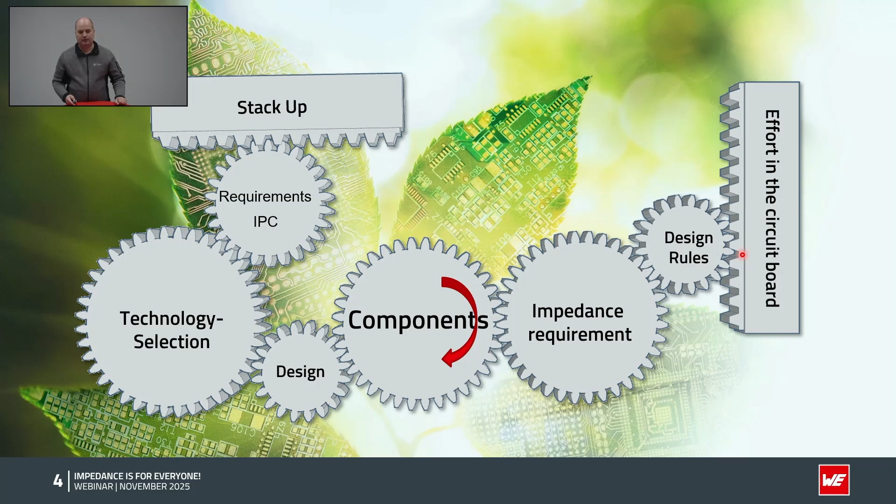And if we go now into the impedance, what is impedance? Where does it come from? The impedance itself is the AC resistance of a conductor. Can be a wire, can be a board, can be a component.

So if you compare it with a DC application, you have the standard ohms resistance, and as higher the frequency gets, as more the impedance takes over, and you have to use this value for the conductor. It starts to get a major influence factor at least above 200 megahertz, so really early, and then you have to think about impedance into your whole design, your setup, and also your components.

Today we have a lot of different ways to get the impedance, and I took the IPC formula as a simple stack-up, and I thought I start with heavy stuff in front, that we get more and more easy stuff at the end. So this is the formula to do a simple calculation of a surface microstrip, and let's go quickly through it and get some ideas what does this mean for us in the practice.

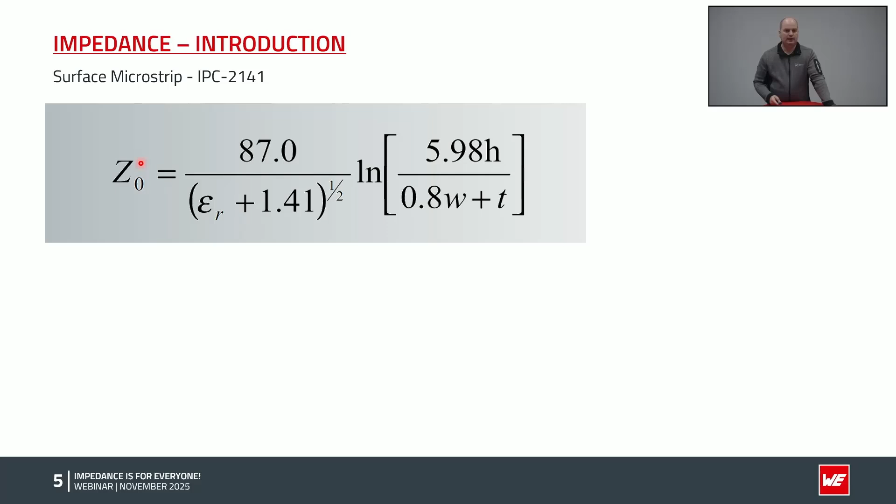So we have the target value, in that case the Z0. This is the impedance value which we want to calculate. We need for this calculation the epsilon r. In math it's often the epsilon r value. In the datasheet it's often labeled dk for dielectric constant. It's the same.

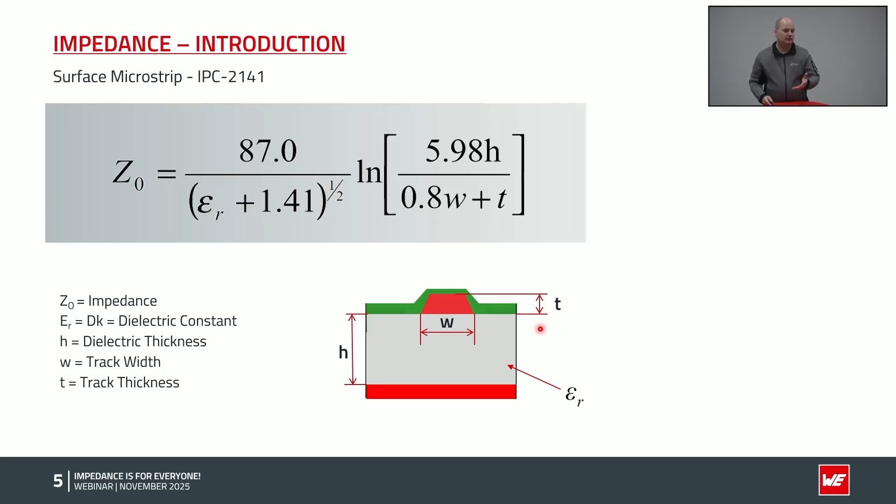The 1.41 is some magic number from the formula, also the 87 natural logarithm here, also a magic number - everything in the books. For us, important is the height of the dielectric, the width of the track, and the thickness of the track. These 4 parameters are necessary for a simple microstrip calculation, and if you have a slightly advanced calculator, you can actually do it by hand. So it looks complicated in the beginning, but it's still possible to do it by hand. Of course, in the real world it's not so easy.

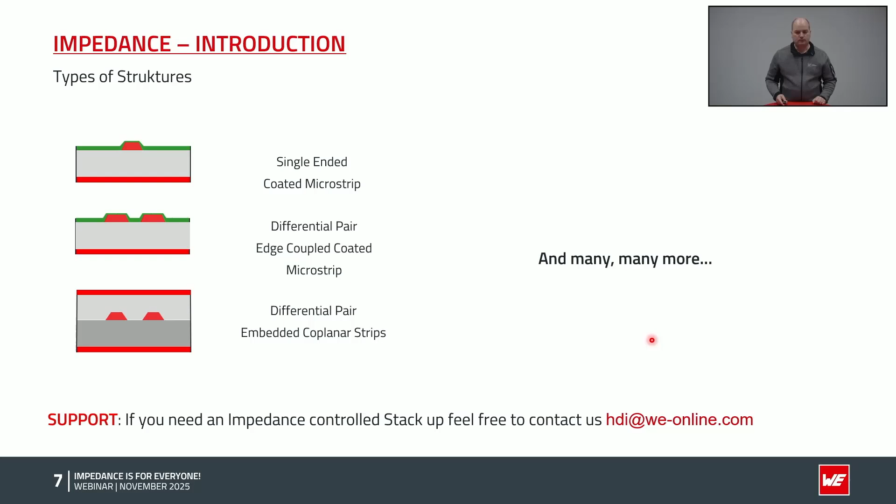Let's skip one slide and go back afterwards. We have a lot of different options. I've shown you the simple version. You can have differential pairs, you can put them on the inner layer, you can use different materials, and of course it gets more and more complicated, which makes it hard for us to find a one-fits-all solution. With my experience, I'm pretty convinced there is no one-fits-all solution. We have to find individual solutions for everybody. The layout is influencing, the component is influencing, sometimes the price is influencing. So if you need an impedance controlled stack-up, feel free to contact us either with your usual sales contact, or you can contact us on the shown email address, and we will find a solution with you together.

As thicker the dielectric is, the more the impedance will raise. The copper thickness, for example, has a low impact. It will not change it very heavily, which is actually pretty good, because usually the copper thickness is set by, for example, IPC reliability requirements. If you have IPC class 3 with 25 microns copper in the via, the copper thickness is already locked in, and you cannot use it as a free parameter in your design choice.

So most of the time we work with the track width and the dielectrics. If this is not enough, we can change the dielectric constant by changing material, either the pre-preg or the whole core replacement, using a more suitable high-speed material. But this, as we'll learn later, is really a big step, it influences a lot of factors and has to be carefully considered. It is possible, but it will usually be very costly.

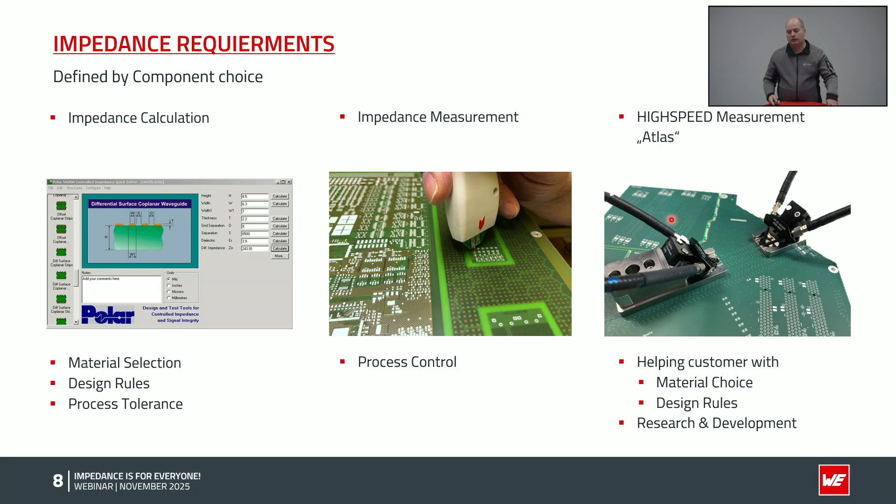It's a very important research and development tool. The effort is higher than standard impedance measurement, so it's maybe not a very effective process control because the effort is so high. But especially in complex projects, it is useful to have real measurement data to check the datasheet values in the beginning.

So this is a quick introduction - what is impedance, why is it important, what is the main influence. Let's go into the design and manufacturing points with a stackup.

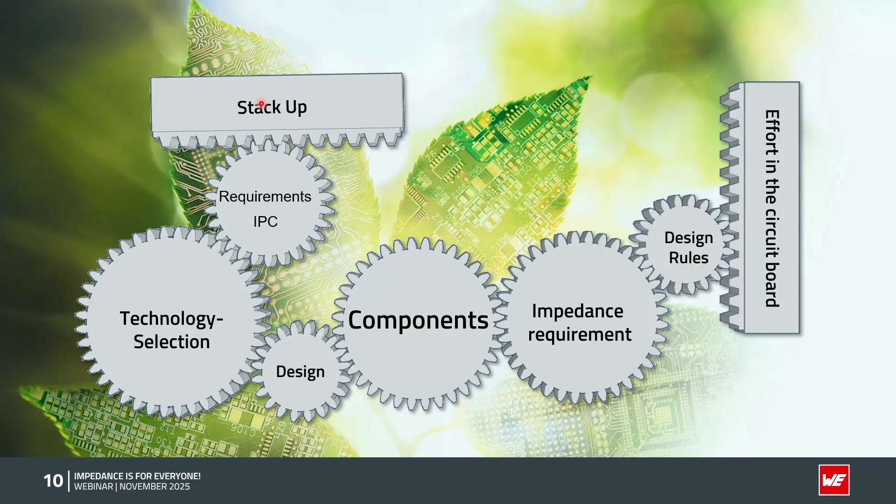Coming back here, if you choose a component, the technology and the stackup is directly influenced. Let's go into a real-world example.

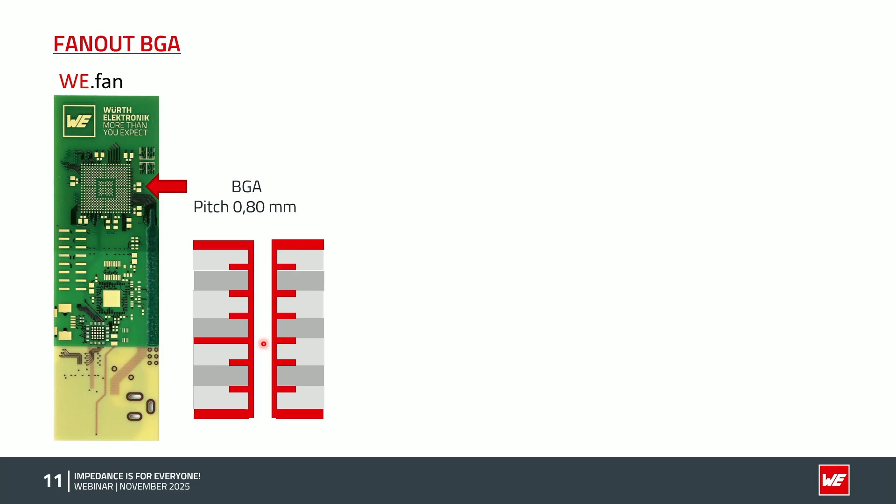You have used a BGA with a pitch of 0.8 millimeters. This is sometimes possible to do in a mechanical fan-out. You don't need HDI, you can use it, but there are sometimes options to make it cheaper. Now this component is not available anymore. You have a successor component, and in worst case scenario, the pitch is only 0.4 millimeters in the successor component, and then it is not possible to do a simple stack-up.

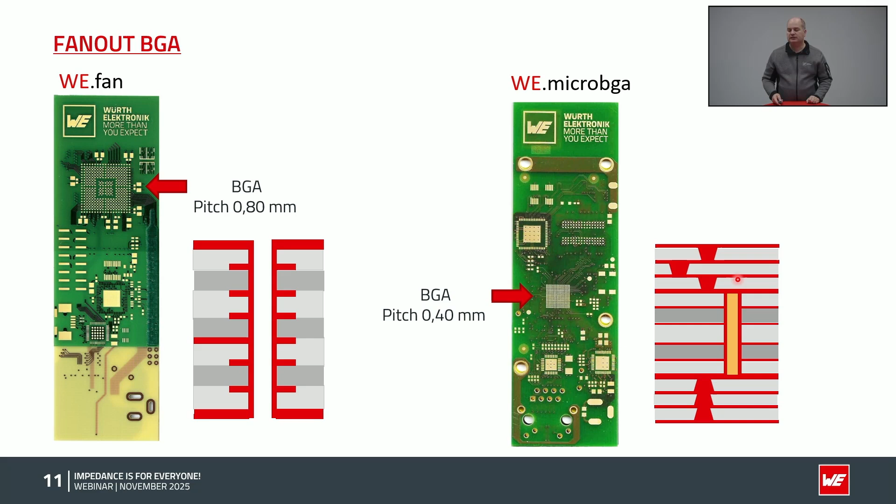You have to use a very complex HDI example. This example is of course extreme, but it shows you the pros and cons of both worlds. So the component gives you the need for some HDI layer. The HDI layer defines the prepreg thickness. Not every prepreg is possible to laser drill, especially very heavy glass fibers like the 7628 - it's not possible to laser drill it. So you have some fixed points here, and we have to consider this in the impedance calculation.

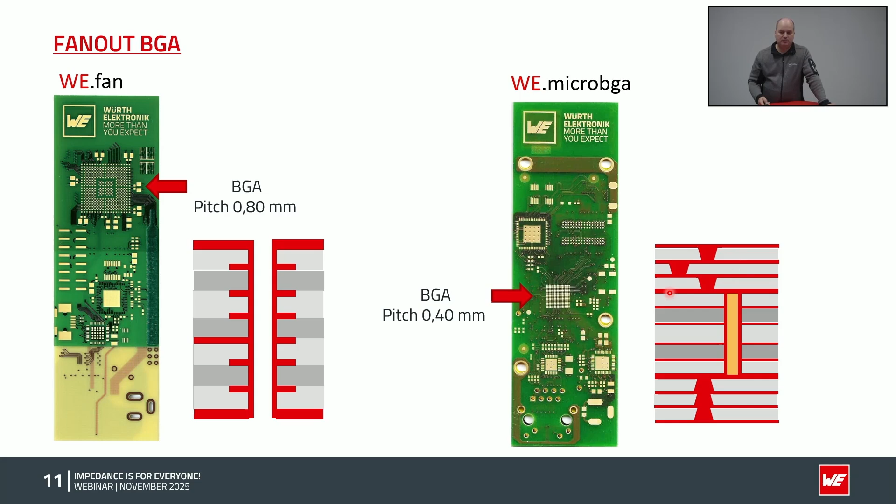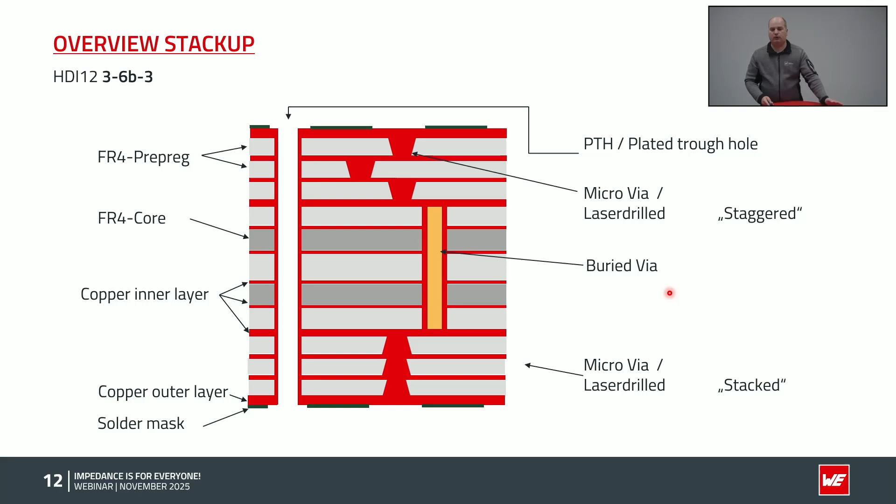How do we build such a board? For your reference, you will get the slides afterwards. Here is the labeling, but for speeding up in time, we will skip over it and go directly into the production. So we start with a 6-layer in the beginning, in the middle.

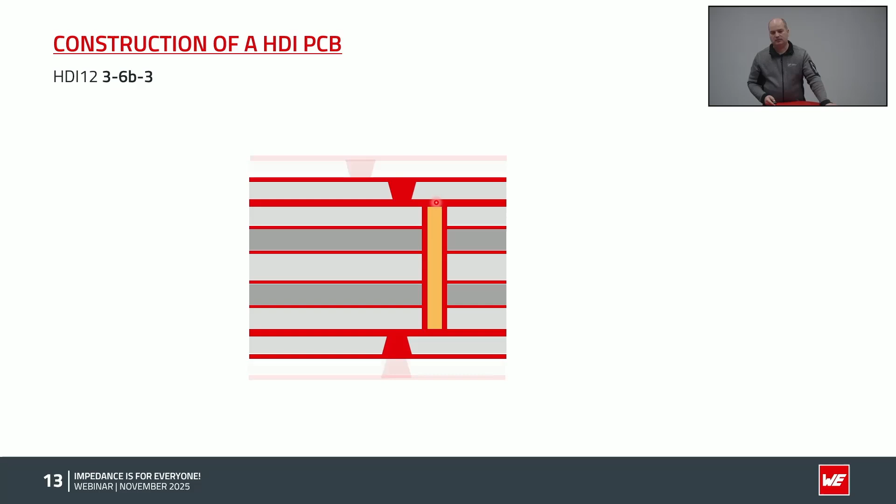Press it, drill the buried vias, fill them. In that case, it's a type 7 filling with a cap on top of it. Then we add on both sides together a new prepreg, go back to the pressing, press the prepreg to this board, go to the laser drilling, drill the microvias, make a copper filling, and repeat and repeat.

So we have to go through several steps in our production. In that case, we have 4 press cycles, 5 photo processes, and 6 galvanic processes. And of course, it should be natural that when the delivery time is going up - a standard 8-layer board has only 1 press cycle, 2 photo processes, and 1 galvanic process, and you have some delivery time. If you now go 4 times through the press, of course, the delivery time must be higher.

So for us, very important, usually the stackup is symmetrical. If you add something on one side, you do the same thing on the other side. If you don't do it, you get warping, for example, in your soldering process, and it's not good for us and not good for you or your EMS. So we love symmetry here.

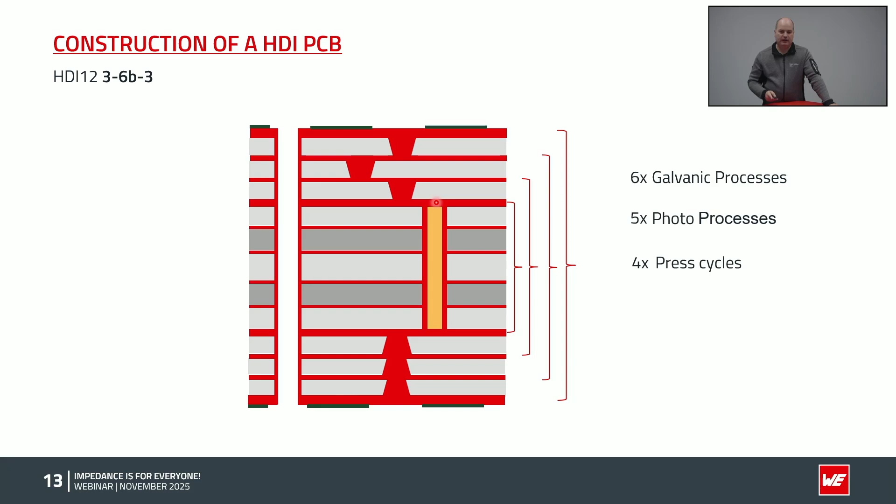Also, the technology choice - if you have a small pin-out, staggered microvias is a feasible option. You can fill them on the outer layer for enhancing the process window in the soldering process. In that case, we have a resin filling type 5 in the microvia, because on this board there are some buried vias. It's not necessary, but also not a bad thing. Usually it's enough to fill the microvia with a prepreg resin in the press to avoid any voids.

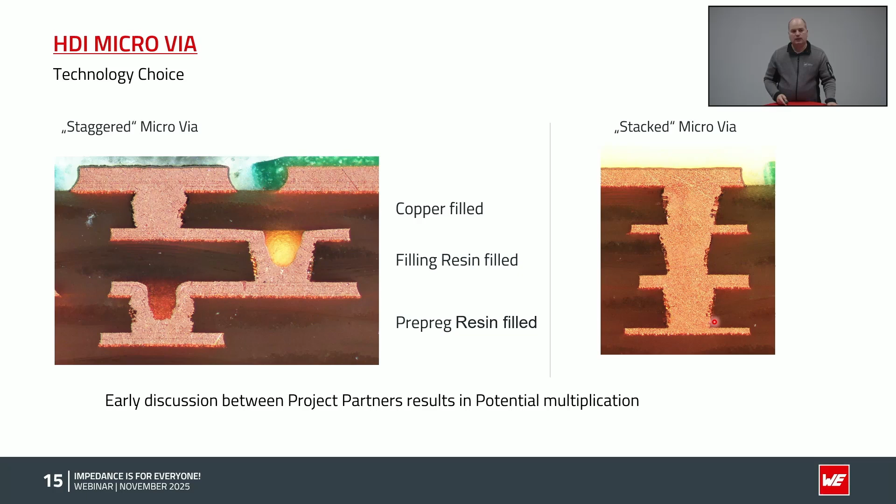But in the case of a 0.4 millimeter pitch BGA with a high pin count, you have to go the stacked microvia way, because you don't have the footprint space in the board. So you have to do the microvia filling on every layer. You can save space, but it's more effort in the production, and more effort means more money. So this all is affected by the component choice.

A next point, also a very important one, is the etching of every layer. How do we etch? Usually inner layers, for example - we start with 100% copper. On the board we want to have some differential pairs shown in the right hand corner, and we will laminate a blue etching resist again on a full frame. We expose it with light, wash away the non-exposed areas, and then we have etching resist with some openings in between. We use some etching agent.

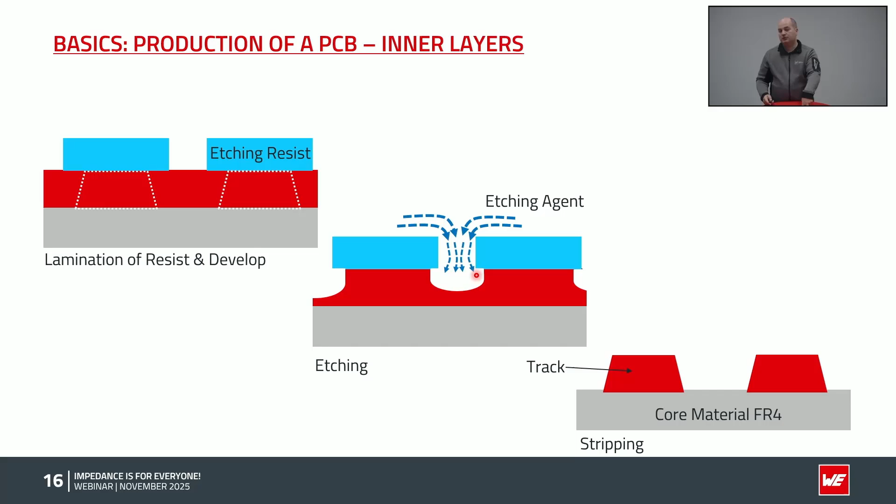We spray it onto the surface, and for every micron we etch to the depth. As soon as the sides are exposed, we also etch to the left and to the right. So if we etch 1 micron deep, we etch 1 micron left, 1 micron right - so for every micron of depth we have 2 microns to the side. And as we etch on, here's a picture from a machine, this typical pattern of a trace is formed.

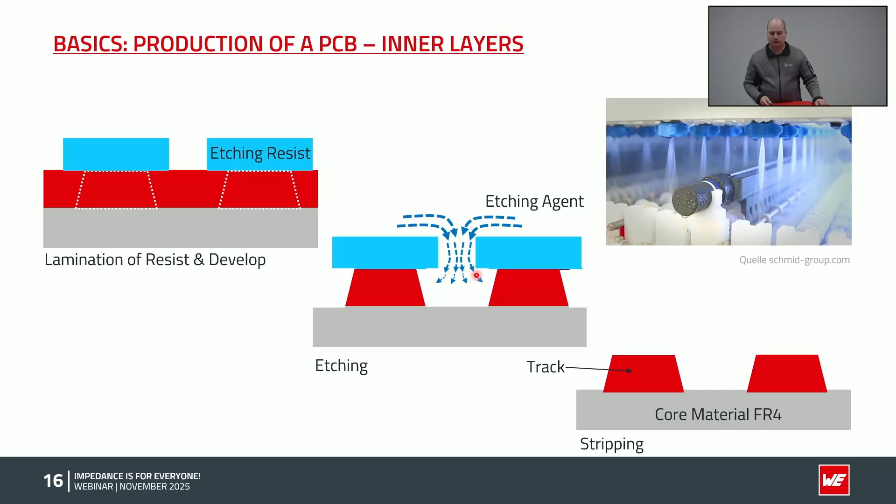And this is very important because the copper thickness is affecting the space in between. The higher the copper gets, the more space we need by physics. It's not our choice, it's just physics, how the etching is working, that we need some space here.

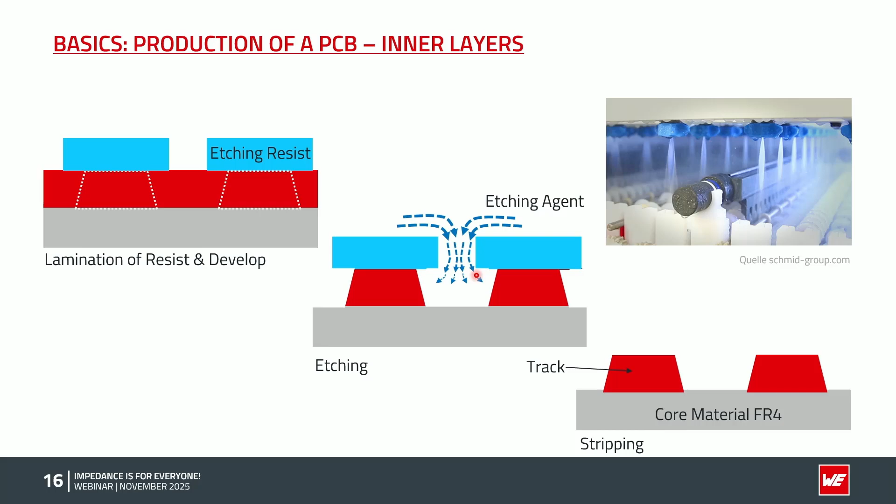We have some design guides available on the homepage.

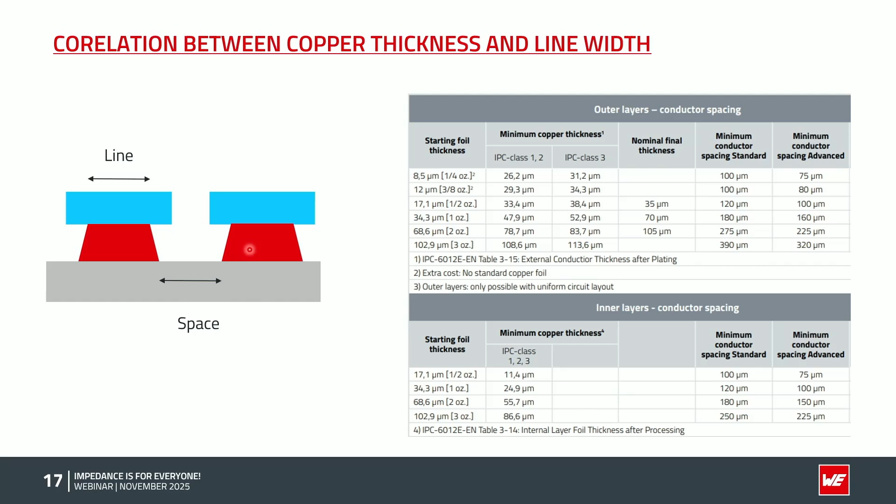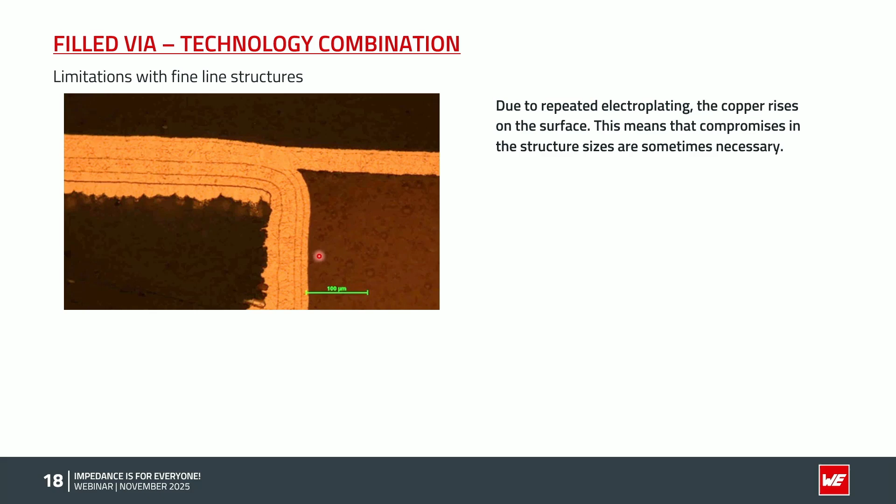As thicker the copper is, as more space you need in between the conductors. For us, it is easier to make narrower traces, to narrow down the line width, as long as we have enough space in between. This is very important also later for the impedance calculation, because if you have some technology combination, like here shown a buried via with a filling with a type 7 cap on top, every line you see here is a galvanic process, and as more we have to go through the galvanic, as higher the copper gets.

What we learned now is as higher the copper is, as more space we need. If we have not enough space, we have here a picture showing what happens when it was not enough - it is a heavy short. This will sort it out in the electrical testing.

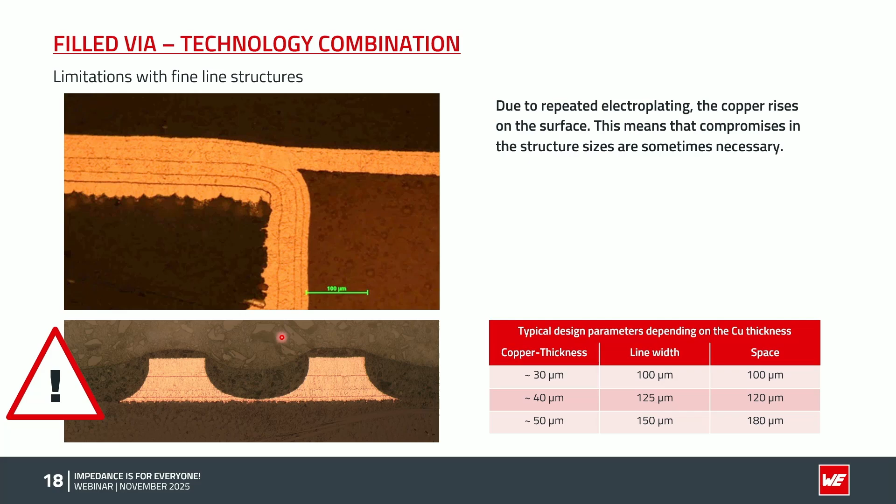But if you only have 1 micron etching more, it's not a short anymore, but it will not be good for our impedance calculation. So here it's very important to find optimal parameters in the impedance setup, in the line and space width, to make a good reliable board that you can avoid such cases, which is layout influenced - very important, influenced by layout - to consider this point.

So okay, let's increase the distance between the tracks. To get the same 100 ohms, we have to lower the pre-preg thickness and also lower the track width. Maybe you have some dielectric high voltage requirement that you don't want to have such a thin pre-preg.

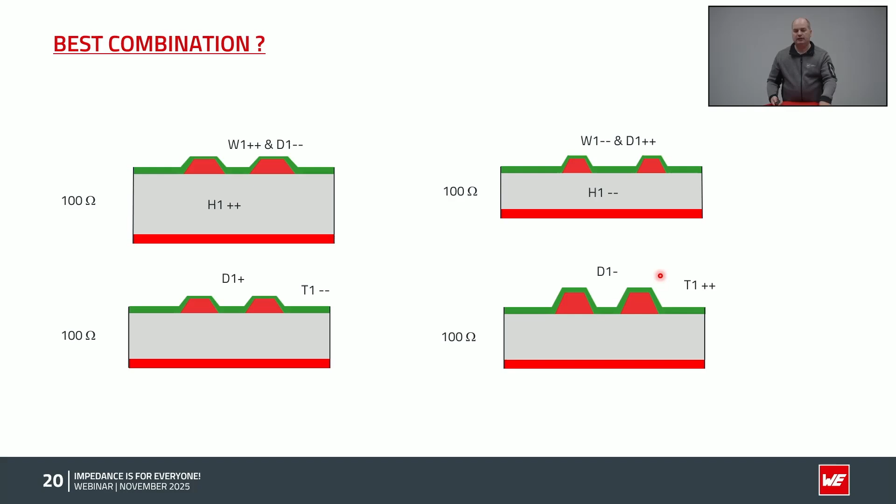So let's jump into high-speed materials. What is going on if we can't find good impedance solutions only by the dielectric and the track width, for example, if we have to change the Dk value of a material.

So what is material? As a quick starter, we have usually double-sided coated copper cores and prepregs. They are made, of course, with copper. They have glass fibers included, and there is also some resin to glue everything together. Let's go through it step by step.

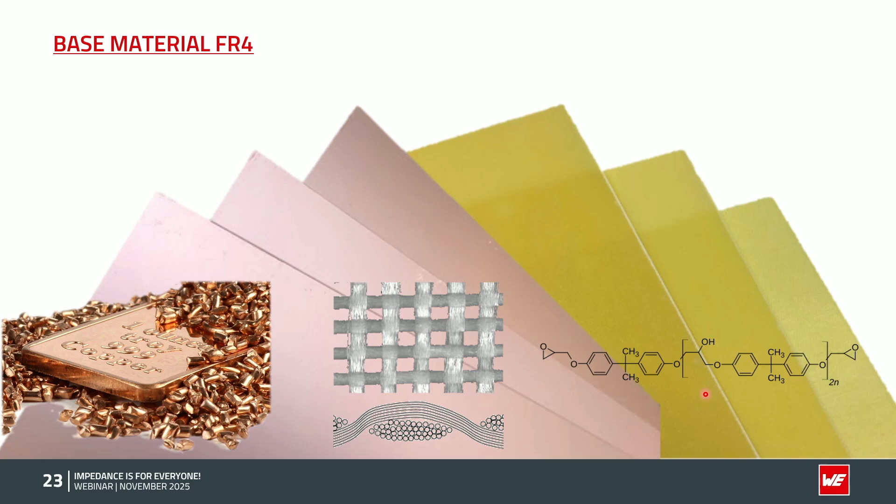First, of course, the copper. That the copper is sticking to the plastic, to the epoxy, for example, it's very important that we have some kind of roughness. Every copper foil has a treatment side and a shiny side. The treatment side is usually to the inner of the core, and as higher the copper is, the copper foil, as more rough it is by nature.

It's in the construction process of a copper foil - as more copper you have, as rougher the treatment side is. And of course, the other side is the so-called shiny side, because usually it is shiny, it's pretty flat. If you want to glue some metal to plastics, and if it's really soft and shiny, it will not stick very well. So we have to roughen up by etching this shiny side and add also an adhesion promoter. If you would do some painting, often this is called primer. We have a similar thing in the PCB setup. So even here we have to rough up the copper and create some roughness.

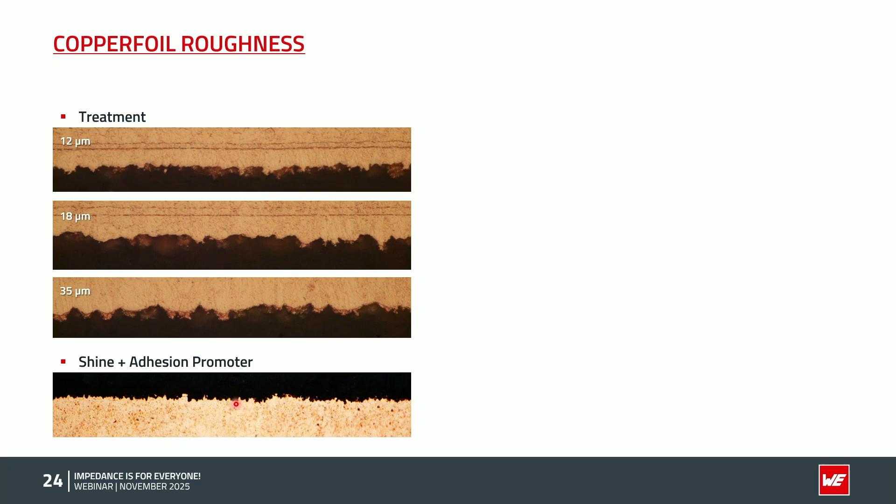Why care about this point, you might ask? There's a physical effect called skin effect.

As a simple explanation, as the frequency gets higher - if we look at a wire, in low frequency or even DC, the whole cross-section is used up by the current flow. As frequencies get higher, the current flows more and more only at the edge of the conductor. In a worst case scenario, at very high frequency, it's really only the skin of the wire.

If we compare that to a trace: if we feed current through a trace, it will not flow the direct way we usually expect. Current takes the shortest and easiest way, but not in high frequency areas - it really goes through every rough spot, because there's also a so-called proximity effect.

Usually we have the ground layer underneath, and the current is also closer to the ground layer. So the rougher the copper foil is, the more skin effect we have.

If you want to learn more about skin effect, I'm sure there are bookshelves full of information and books and seminars about it - you could fill a whole week just with skin effect. So let's keep it simple here.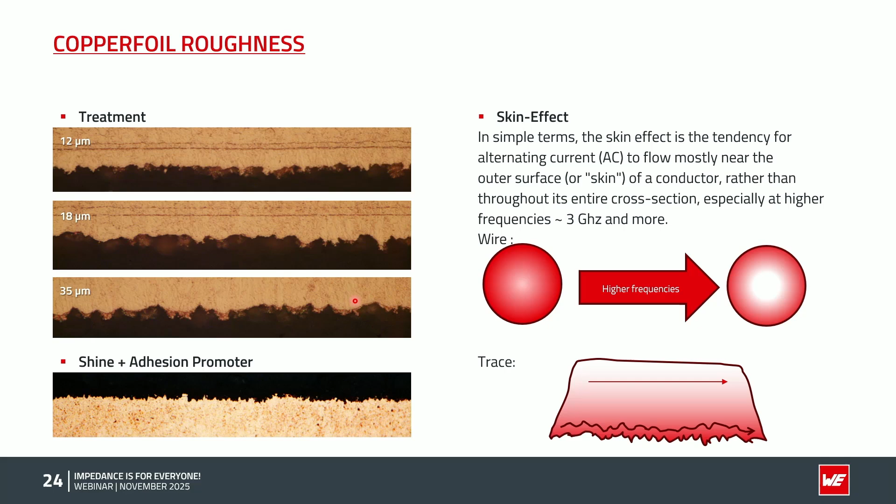If you have a really high frequency board, let's say more than 10 or 15 gigahertz, sometimes it's necessary to use dedicated low profile copper foils with less roughness - but of course less roughness means less adhesion. In a perfect world we'd use a completely flat copper foil, but then you could just peel it off the board and couldn't solder any components to it. So again, a compromise has to be found.

If we look at a pre-preg, the glass fibers in the board, there are several cases - this is just a short extract, but on the market there are typically 20 different styles. They're usually labeled with names like 106, 1080, 7628, which is maybe one of the thickest, and usually not used in high-speed boards because the parameters aren't optimal. Usually it's the other ones, and many more - just as a reference example.

An important thing here: we have at least two different materials inside. We have the glass, which has a typical value of 6 in epsilon r, and the resin itself in an FR4 board has 3 point something.

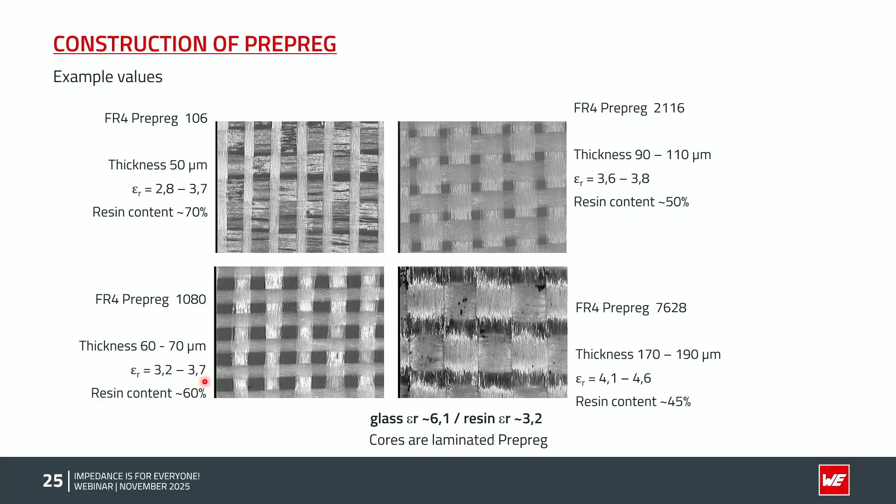On the datasheet you find different numbers because you see a summary of these two values, and if the resin content changes - either by design choice or your layout, which of course influences the resin content after pressing - the parameters will shift a little bit. I'm sure all the datasheet values are correctly measured and can be trusted, but the layout will influence this value again, so we need some experience to feed into the impedance calculation - knowing that with this typical layout or another kind of layout, we'll later have a typical resin content of something else, and then the value changes.

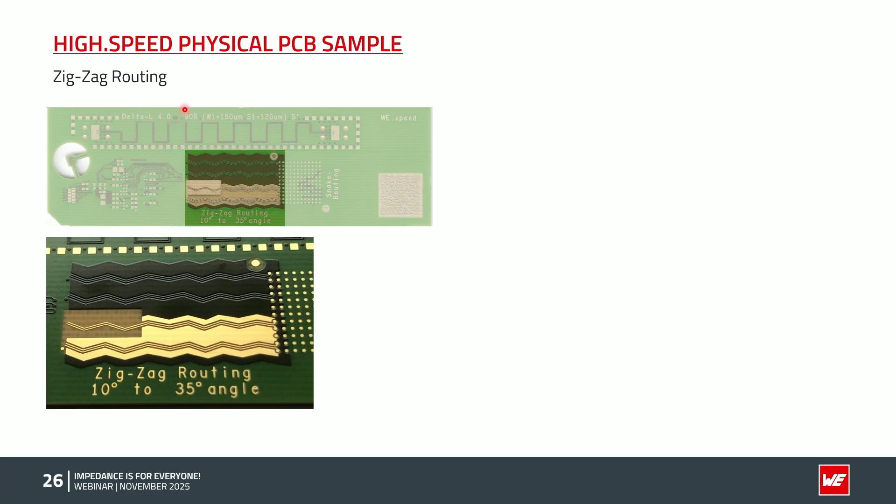Again, a short extract - we made a dedicated high-speed seminar about this roughly a year ago, about our physical hand sample, and there's a so-called fiber weave effect where these parameters will influence things. For example, we have a differential pair where one trace is directly on top of a glass fiber, the other is directly over these holes where you have 100% resin - this is a disadvantage. The parameters will change, the speed of the signals and the runtime of the signal will also be influenced.

So what is a good option? You can tilt the whole board, your design, in our production panel by 10 or 15 degrees. But this lowers the outcome - how many boards we can produce at once - so the costs will rise.

Maybe you have only a few signals, so you can go with this zigzag routing, and only the most critical signals are in this zigzag pattern, mixing all the parameters, and then it evens out. Usually such a case is important at frequencies of 20 gigahertz and higher.

Most customers are not in this area, happily, because if you want to design such a thing, most systems did not support it. They are working on it, but it's not implemented yet, so you have to draw such a pattern by hand.

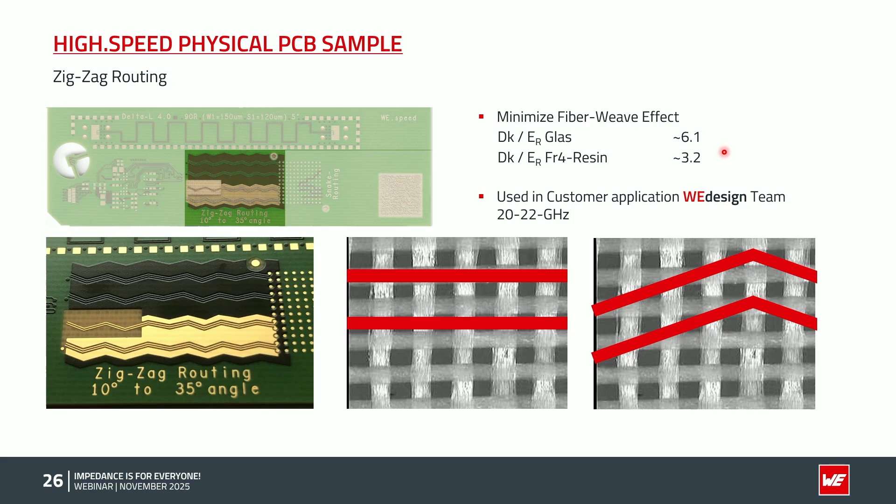So the last part of the material is the resin. For high-speed properties, the resin has a very big influence. We come from the good old epoxy resin, for the last 50, 60 years we used in most cases an epoxy-based system.

Every raw material supplier nowadays has a so-called mid-performance material. Our choice was Panasonic Megtron 6. It uses a different kind of resin, not epoxy anymore, it's a PPE resin system. We have a TG at 185.

The Dk is very low compared to standard raw material, and also very important, the loss factor. Don't get mixed up by this 4.

You still find in a lot of application notes on components Rogers material used as a reference. Rogers had a good start very early in the beginning of this high-speed development. They offered good performing material. If you compare the values, they are pretty similar to these values nowadays.

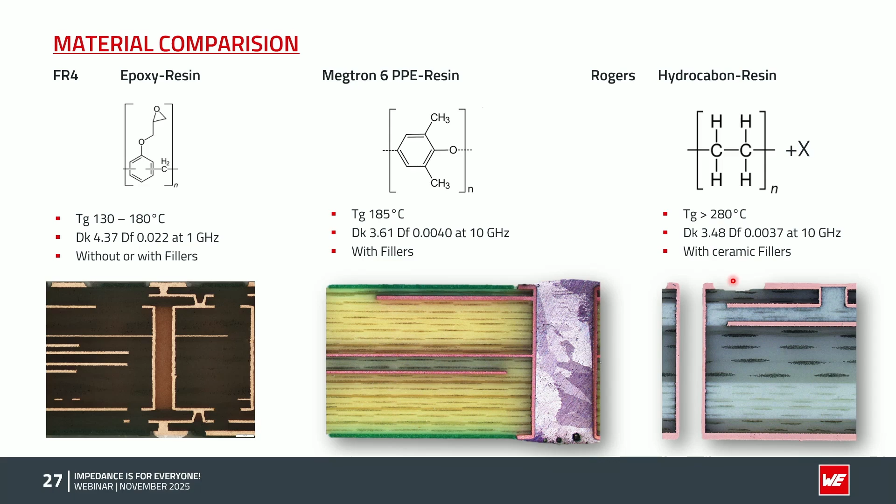So changing the material has a lot of heavy impact. If you have a good material choice, a mid-performance material with similar parameters, it's not so critical in drilling, for example, compared to using ceramic fillers with similar properties. So it's very important whether you can change the material here.

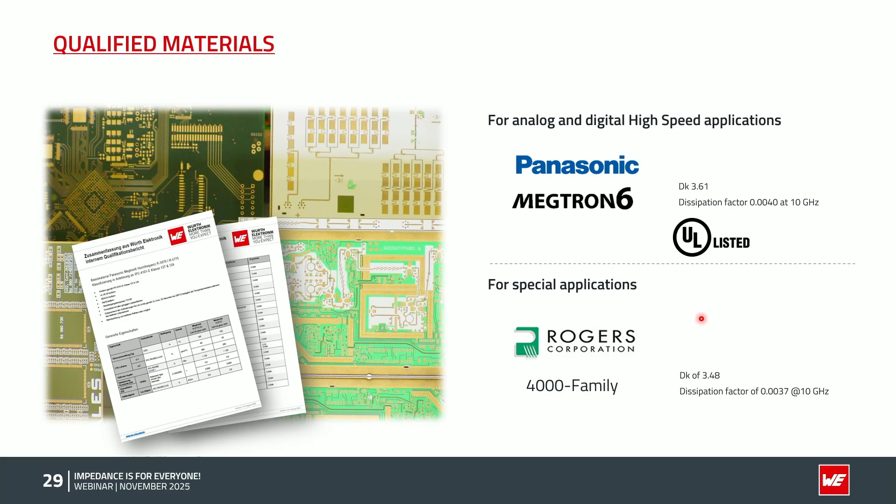We have a lot of materials qualified. Today our go-to material for high-speed applications is the Panasonic Megtron 6. Shortly we'll have a Megtron 7 also available. We can also do the Rogers material if necessary, and our partners in Asia also have a lot of materials available to get you some ideas.

We have these nice physical samples, which are really a good starter to get introduced into the material. You can order your sample for free at the shown address.

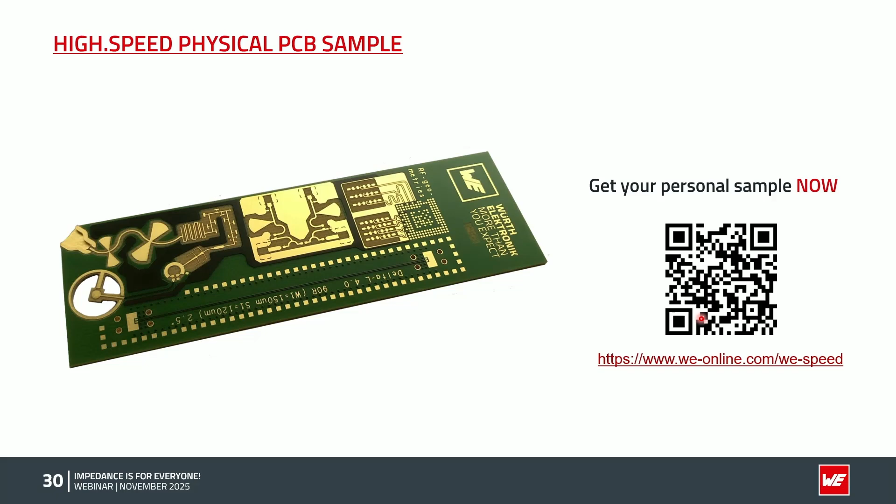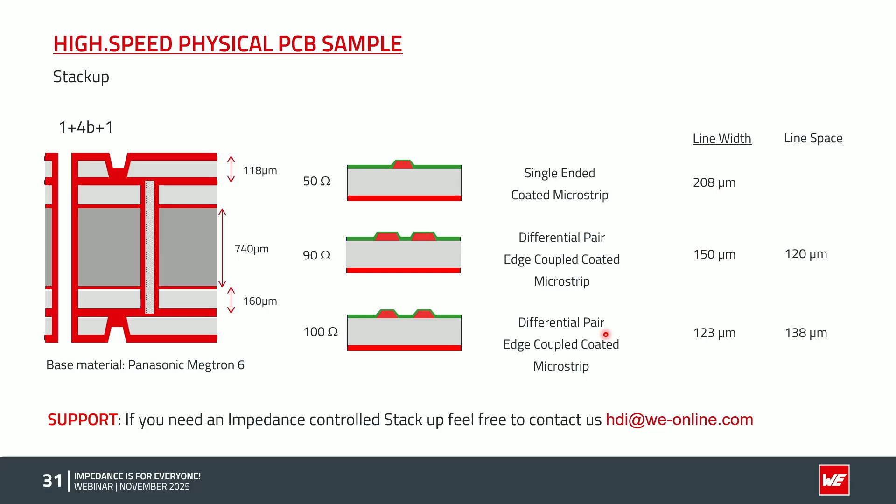There's a lot of information available. We have also shown how to make the impedance calculation on this stackup. Again, not as a copy and paste solution, just as an idea, as a starter to show you what the options are with this material. If you need a solution for you, feel free to contact us either with the shown email address or with your usual sales partner.

And we find a solution together. Very often, also in discussions about high speed, we get requirements about backdrilling.

So what is backdrilling? Backdrilling is usually used if you have a via going from top to bottom and you only need the connection from, let's say, top to layer 3. Then the rest of the via acts like an antenna, can pick up strange signals from outside or from crosstalk, and can mix up your signals and make your signal integrity worse.

What was the solution in the past? Drill the via away, drill it back, and get rid of the stub. This technology was invented before HDI microvias were available. Today we have microvias, very reliable, very widely used. So today it's very easy to find an HDI solution. It's cheaper, faster, and more reliable than doing backdrilling.

So if you need something like this, really consider going for an HDI version. Even though we can do backdrilling and offer it, it's a lot of effort.

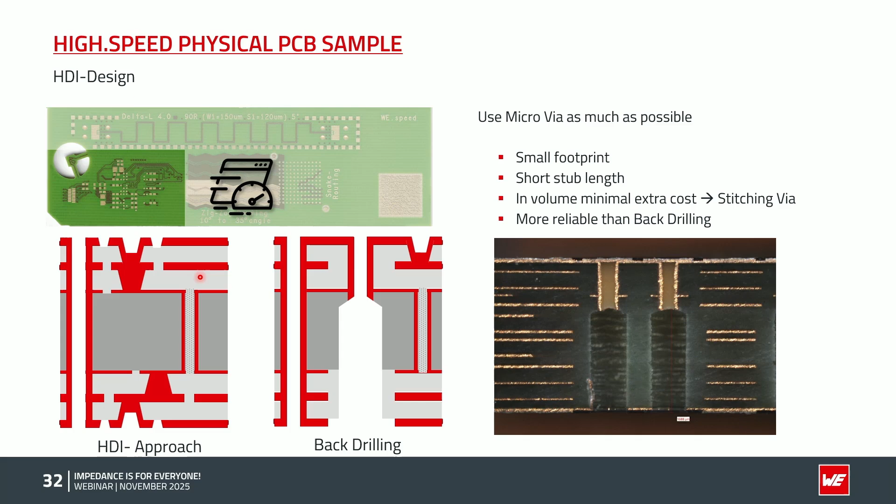And then, for example, you have a waveguide where you have a shield on both sides on the ground, and maybe you solder a lid on top, and then you have 100% shielding all around with not much effort on the PCB side. So this is really to give you some ideas, be creative, to achieve nice solutions.

you often need very narrow spaces and also small conductor spacing. But outside, if you have other components, please give us some wiggle room, give us some space so we can achieve a good yield. So if it's narrow, yes, you have to go small, but please give us some spacing in the other areas.

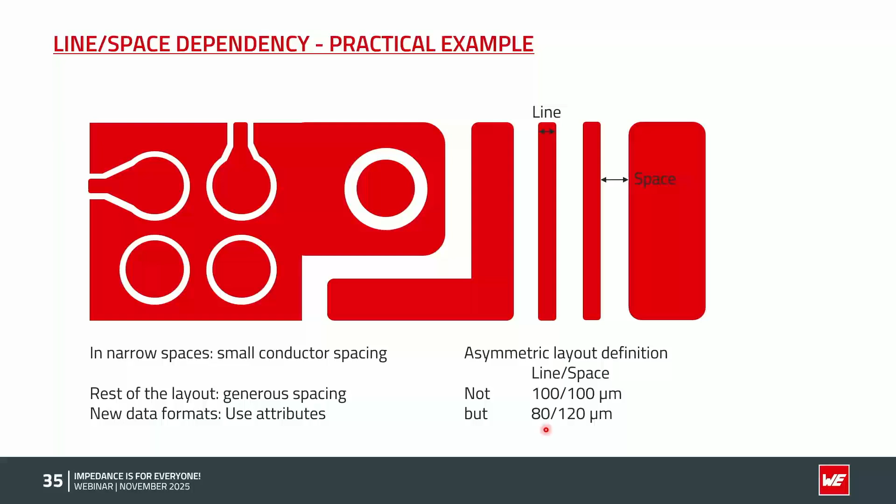Also, with the same footprint, typically the definition is, for example, 100-100, a symmetrical definition of line space and line width. But why not use 80 line width and 120 space? It makes production simpler, easier, higher yield, lower price. For you, it's the same footprint, and often if it's only a signal, the 20 microns doesn't matter for the signal properties.

Also, a customer had to change a component. The 0.8 pitch component was not available. He didn't want to do a 100% redesign of the board. The new component had a pitch of 0.5, and he was using the same impedance calculation. So in the new design, the distance between the tracks didn't fit anymore. So he had to change something.

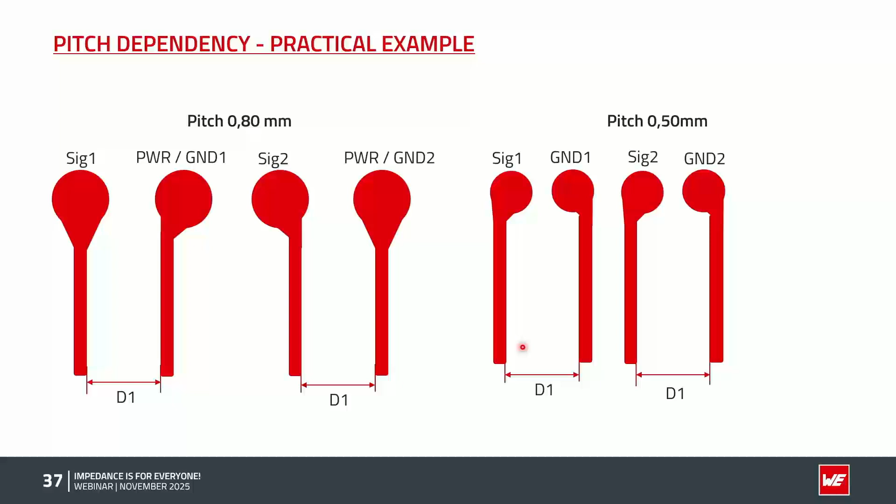What did he change? It's very easy - just shift the tracks away so that you have the same spacing, which was also the correct one for the old impedance matching. But now the signals are so close to each other that between the two different signal sources you get crosstalk. And this should be avoided.

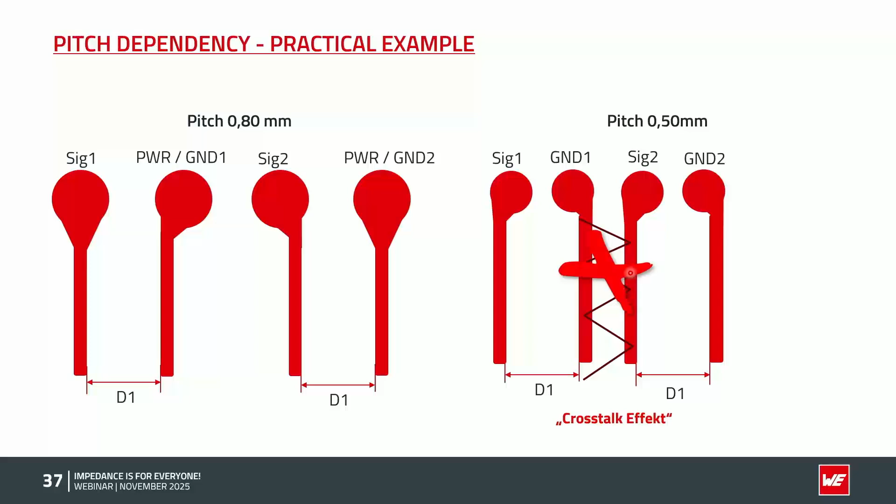You will really mess up your signal properties. Usually it's very hard to find if the layout is already done, and if you measure the performance and see it's not there, you have to invest a lot of effort to find such problems and fix them afterwards. So we found a solution together with him - we added microvias in that case, put signal 2 onto the inner layers, and the problem was solved.

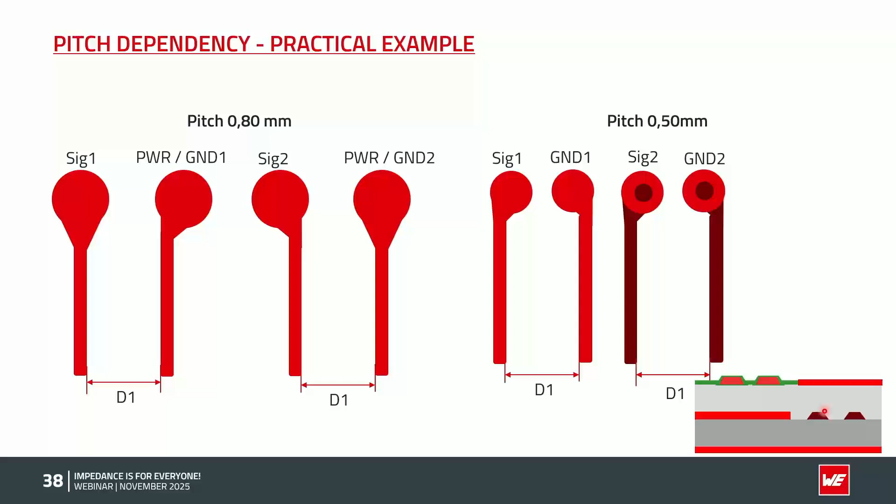So here, best practice is really a good thing. With flexible stackups, of course, a separate calculation for the rigid and the flex part is necessary. And we recommend, for example, in the flex area that you add such a crosshatch pattern, so that the drying is better and faster and you avoid delamination.

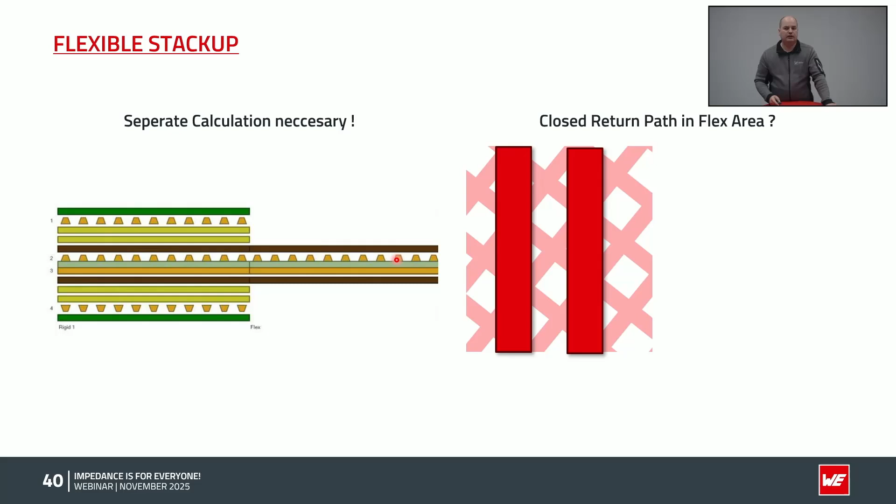But if you have a differential pair above these structures, again we have seen this fiber weave effect. It's a similar effect. You don't have a closed return path, which is really bad for a signal. The impedance simulation can simulate it, and you can adjust your parameters to it, but maybe you can just use a closed ground layer just in this area where the tracks are, and around it you still keep the crosshatch pattern.

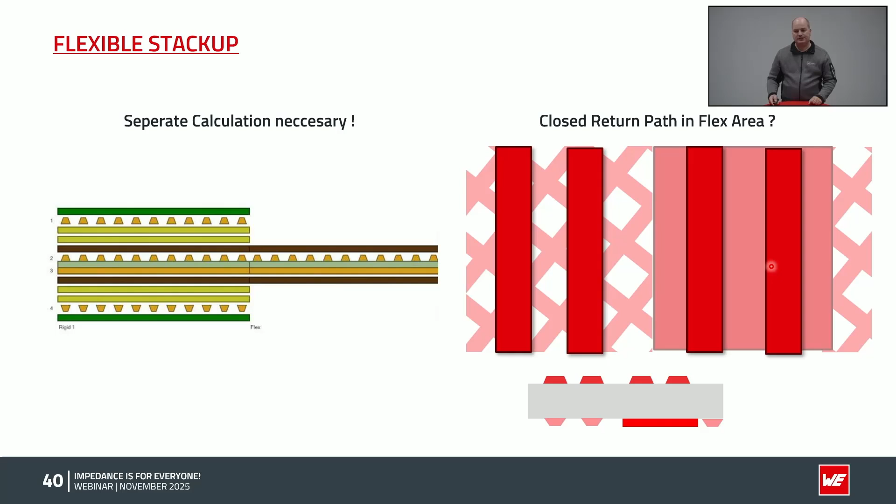The drying should still be okay, and your impedance signal is more stable, more reliable, and gives us in the whole tolerance section more wiggle room.

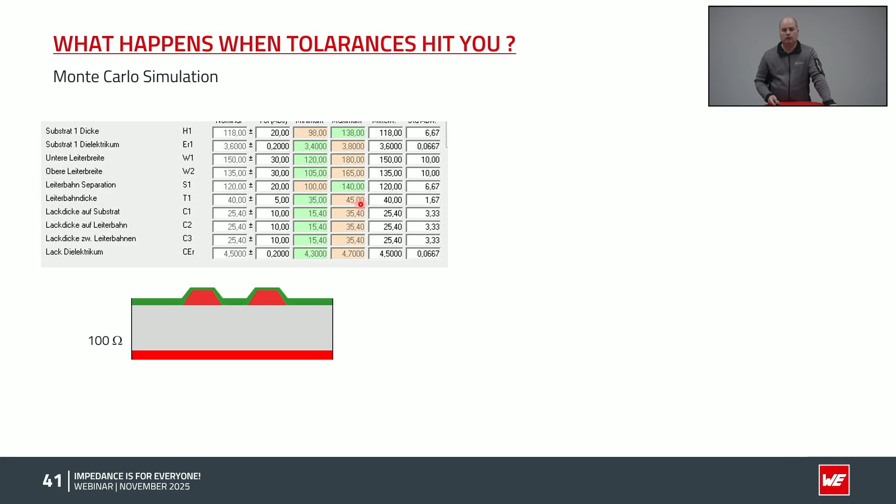Also talking about tolerances, a very important step. The Polar software has the nice option of a Monte Carlo simulation. So you use the properties of your design, and you can feed in some tolerances, for example typical process tolerances or the IPC worst case scenario, whatever is available. And then the software does 1,000 iterations, for example, doing a calculation with all different options, and so on. And then you get such a graph.

What does the graph show us? The target impedance, again, was 100 ohm differential pair. 100 is somewhere here. So if we have a look at the total graph, the whole graph is right shifted. So in most of the cases, even if the standard calculation which you do is exactly at 100, if you have the typical tolerances, the whole thing is more in the area of 103 ohms, which is inside the tolerance but not a tight fit.

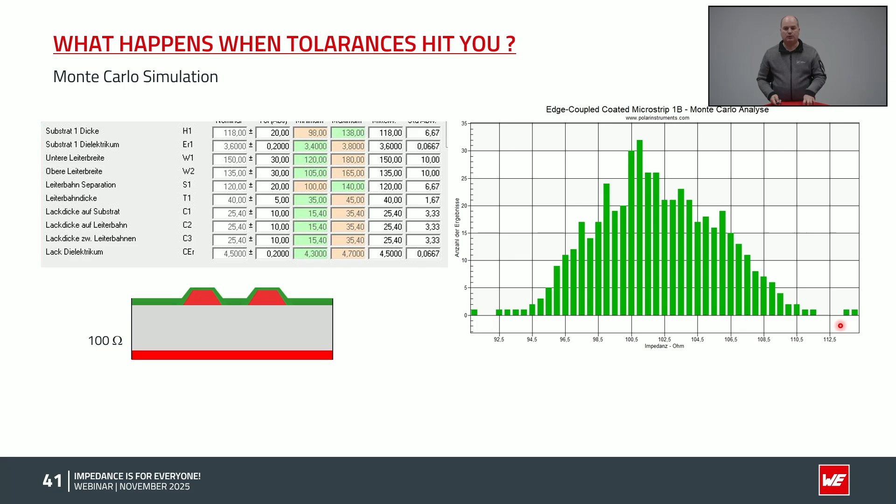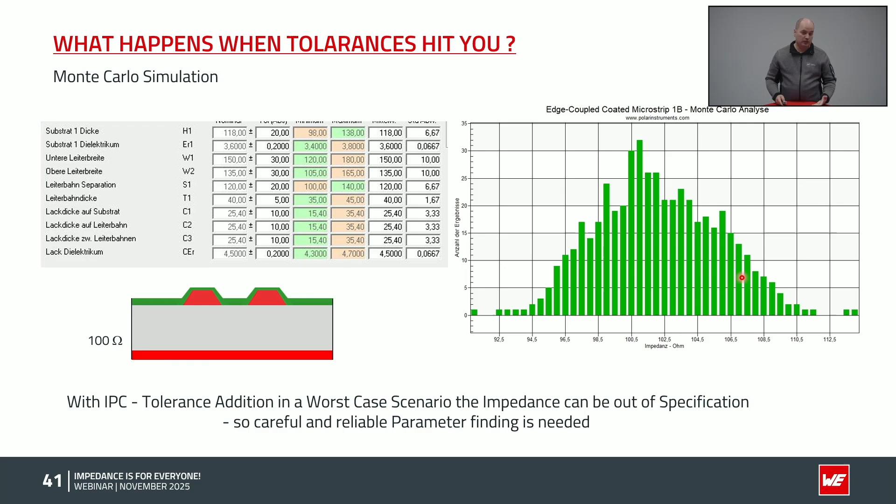And sometimes even you have some extreme options inside the IPC tolerances by the layout, but outside of a typical plus minus 10% of the impedance calculation, even if all the parameters are inside. So this is the point where you really need experience and have to find a best fit solution for your layout so that you can avoid such a shift, because the math is right, it's exactly 100. But in the real world, you have a drift, and this can only be compensated with a lot of simulation or with a lot of experience in PCB production, which we have.

So coming to the summary, how to approach a completely new design. Either you have the experience and you can use it, or you have the competence to do all the math. You can go trial and error, order some prototypes, measure it, fix it, order the next prototypes. But then what is time to market?

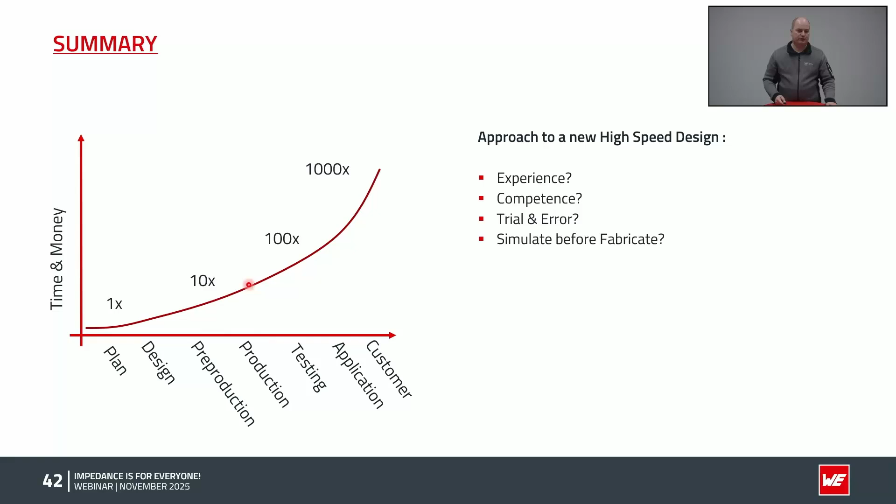Can you simulate before you fabricate? Today there are a lot of tools on the market, but very often the licensing of the tools is very expensive. And the later you recognize such a failure and fix it, the more time and money you have to invest to fix the problem.

So what can be a good approach? You do a planning, we together do a good impedance controlled stackup. We find design parameters. If you need assistance with a design, we are happy to help you with a design team. We can do a feasibility check, give you some feedback in the EQ process to optimize it further. In production, we have a lot of quality control. Sometimes, especially with antennas, a design-in is necessary—that's the more or less trial and error part. And at the end, we can test the parameters to really see on every production panel that we achieved all the calculation and planning.

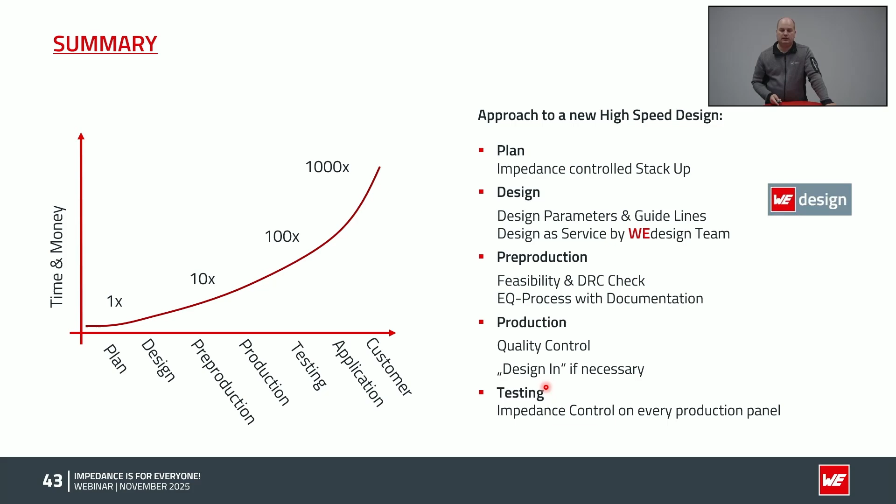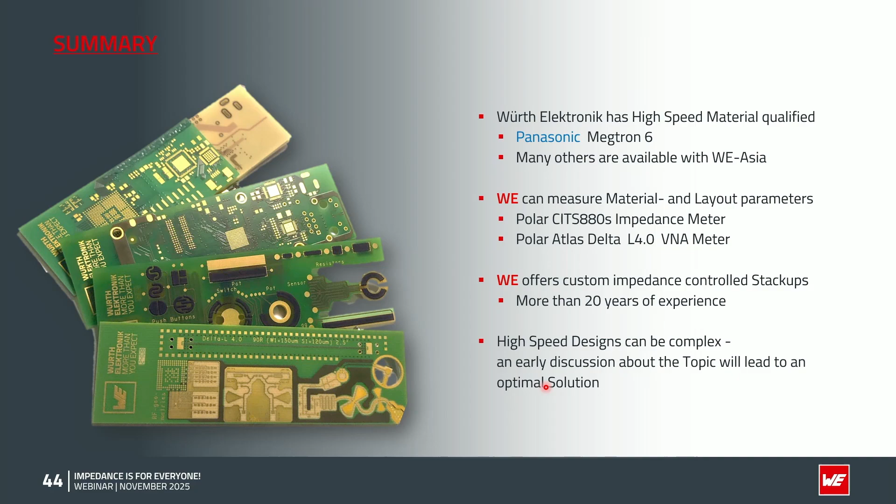So as a final slide, we have qualified high-speed materials in Germany. We have a lot of partners in Asia which can support us with different materials. We can measure material and layout parameters with a Polar system. We have a lot of experience in controlled stackups, and definitely high-speed design is very complex and it's hard to squeeze a lot of information into this time frame. So if you have any questions, feel free to have a discussion with us about your design. And with that, we are on the final slide. Thank you.